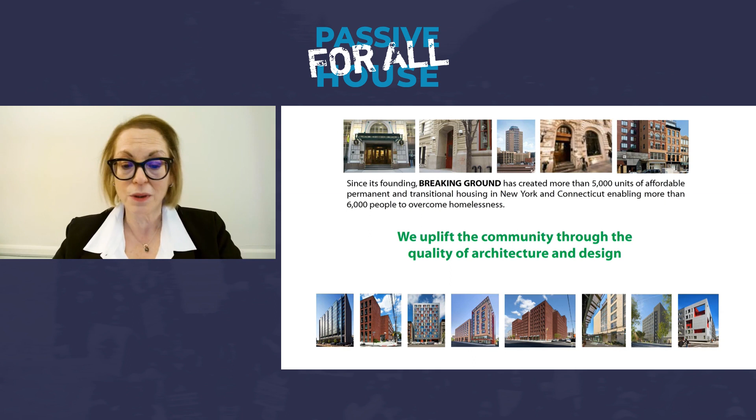We do street outreach in Brooklyn, Queens, and Manhattan. We provide some transitional housing and drop-in centers, but we primarily build permanent supportive housing where all of the tenants have rent-stabilized leases. We provide social services to all of our tenants. All of our buildings have on-site social services. We manage the buildings and partner with social service providers.

We house the chronically homeless, mentally ill, veterans, seniors, youth at risk of homelessness, people with HIV/AIDS, and low-income folks. Providing supportive housing is far less expensive than caring for people on the street. It saves the cost of EMS, emergency room visits, psychiatric hospitalizations, and incarcerations.

I'm always asked who pays for our building projects. It requires cobbling together many sources of funding. A typical project will have federal, city, and state funding, each with its own regulations and requirements, the largest source being low-income federal tax credit equity.

The buildings that we build don't cost any more to build than other supportive housing projects. However, supportive housing is a more expensive building type than other multifamily housing, as there is more plumbing and electrical work due to the higher proportion of smaller units with more kitchens and baths.

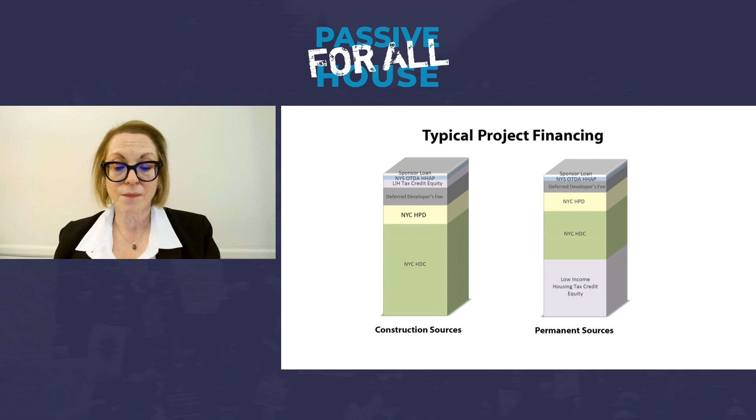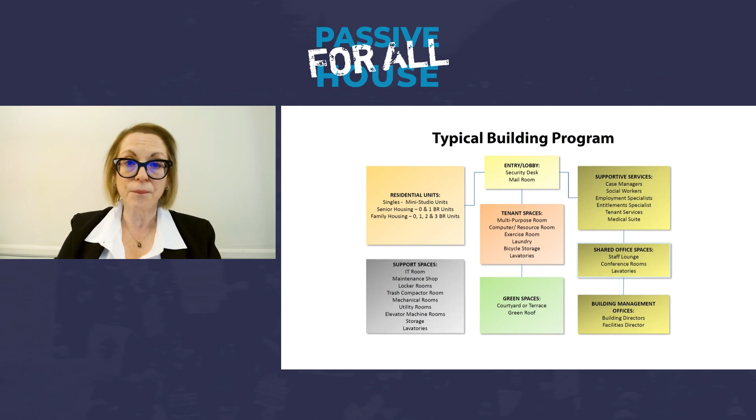We've been providing microstudios for 31 years. We're allowed to provide them in our new buildings as our projects are classified as community facilities with sleeping accommodations under Use Group 3 of the New York City zoning resolution.

The mini studio size has increased significantly over the past 10 years. New York City's supportive housing design guidelines and enforcement of federal ADA regulations have changed, requiring larger bathrooms and kitchens. The downside is that the larger the unit size, the fewer units we can fit in a building, the fewer people we can house.

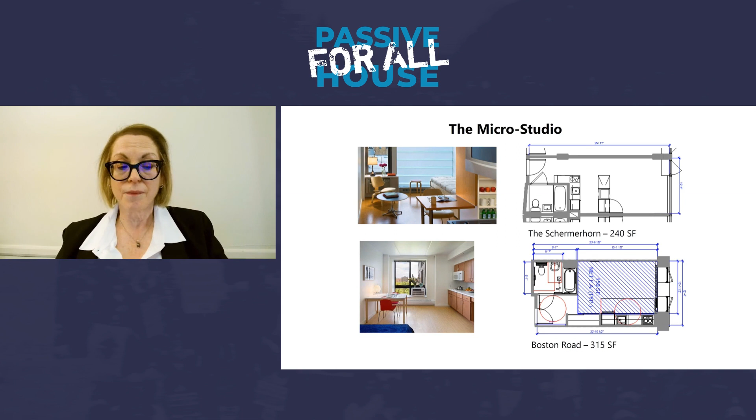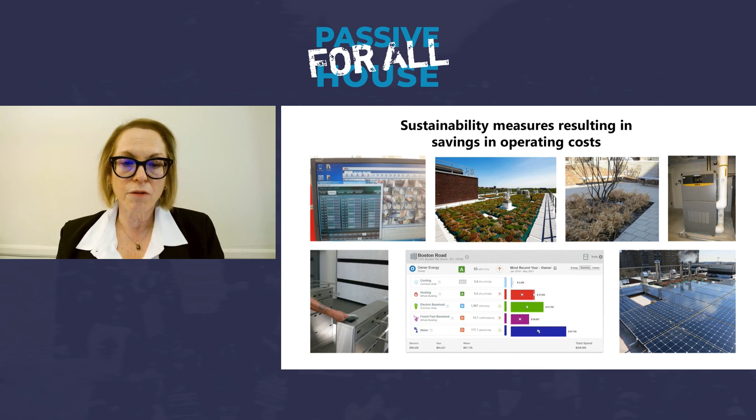Other common features in our buildings include green roofs, drought-tolerant planting, recycled materials, renewable energy, and high-efficiency boilers. We have always commissioned our mechanical systems and monitor energy usage across our portfolio. We insist on mock-ups and testing of wall systems. Our energy consultants and contractors perform blower door tests early and often.

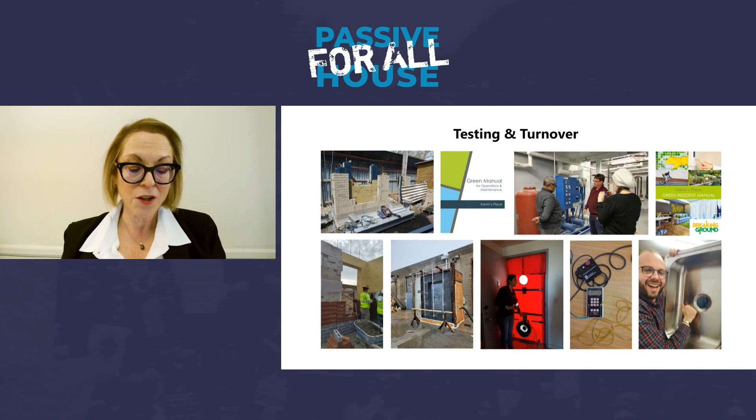We train our operations staff on how to operate all of our building systems efficiently. We contract our energy consultant to produce a green operations manual as well as a green resident manual. It is really helpful to recommission our buildings after the project has been occupied for a year. And as you can see, we also test the quality of our stainless steel sinks.

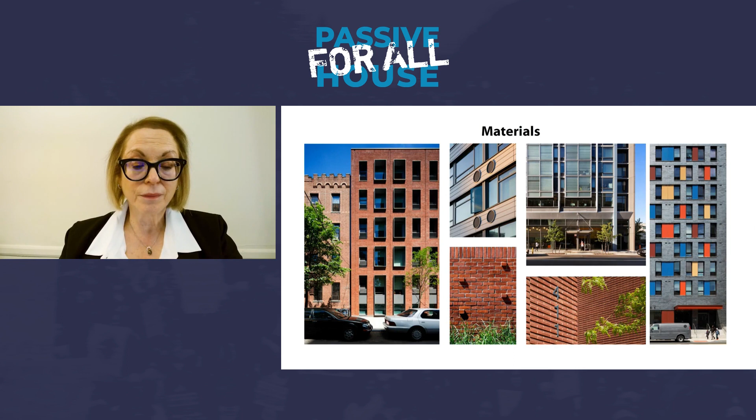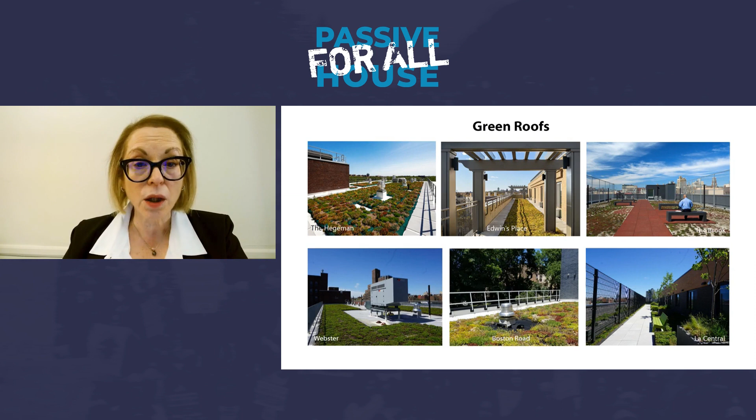Some of the things that make our building special are the materials we use. We build contextual buildings with high quality materials and construction. We give our tenants a safe space to enjoy nature in an urban environment. Whether for tenant relaxation or purely for energy conservation and stormwater retention, we provide green roofs in all of our buildings. We require that natural light be provided in corridors, lobbies, and public spaces.

And now a short survey of some of our buildings. Our first new construction project was the Schermerhorn, located in downtown Brooklyn. The architect was Ennead. The Actors Fund is our partner on this project, which includes a 200-seat black box theater. The low-income tenants are primarily related to the entertainment industry.

The flat plate concrete building sits on 4 steel trusses atop a subway tunnel. As it required a lightweight facade, the architect chose to use channel glass on the front and a cement board rain screen at the rear. The storefront space activating the street houses the Brooklyn Ballet School. The project is actually part of a larger development site. The developer of the adjacent luxury townhouses gained additional floor area, and we obtained the land for free.

The Brook is located near the Hub in the South Bronx. The architect is Alexander Gorlin. This is one of our first brownfield sites. The location was in a particularly difficult high crime area when we started the project. There has been much development since, including 2 of our own projects, La Central and our passive house, Betances project.

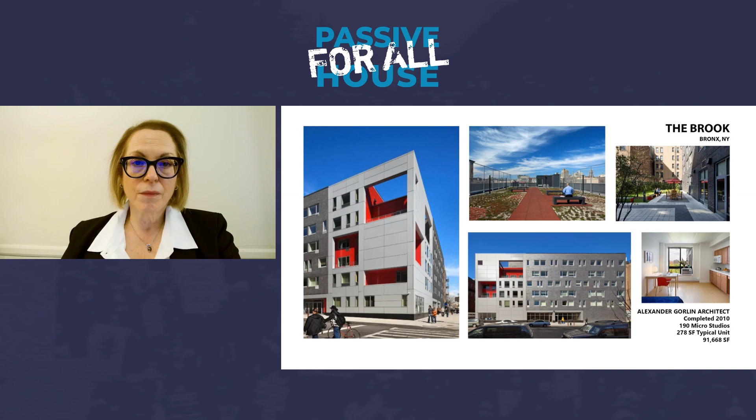We usually try and avoid building deep cellars to minimize foundation costs. All of this building's common office and mechanical spaces are located at the cellar level, the lobby slightly below grade. You ramp down to the cellar level to access these spaces. This is a zoning trick that we employ whenever possible, as the cellar space is not counted as floor area, so we can increase our unit count. All of our buildings have multi-purpose rooms that can be divided for different activities, laundries, exercise rooms, computer labs, and bicycle storage.

Boston Road is located in the Morrisania neighborhood of the Bronx and was another brownfield site. It is Alex Gorlin's second project for us, and some of the project's funding came from the Medicaid Redesign Team program, housing folks who have high histories of Medicaid usage. The building was more expensive to build than our earlier new buildings due to new requirements for emergency generators for life safety and larger on-site stormwater detention tanks.

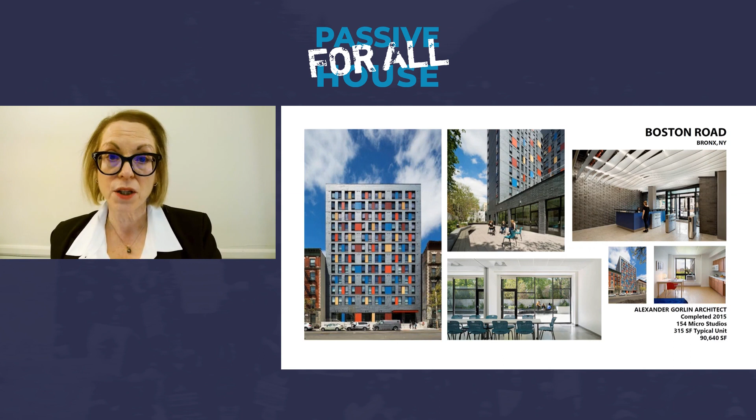We completed 2 projects on 1 large site in the Tremont neighborhood of the Bronx, working with CookFox once again. The brownfield site required extensive environmental mitigation, including a subsurface depressurization system. It was our first family affordable project and is an L-shaped building with studio, 1, 2, and 3-bedroom units, and a supportive housing project with micro studios and space for offices for our scatter site housing program, activating the street.

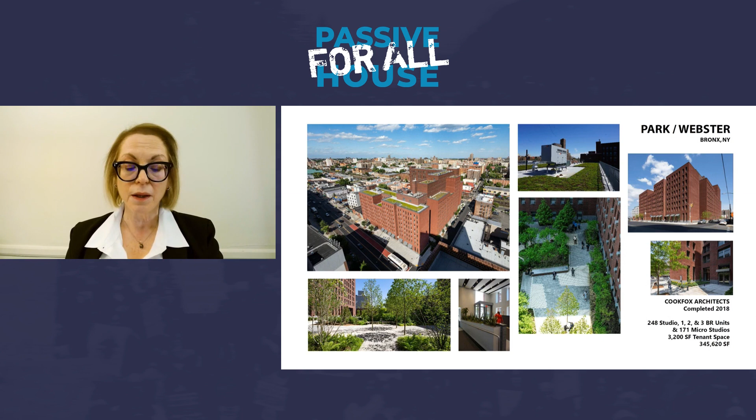The 11-story L-shaped building on the right is the affordable project, and the 9-story bar-shaped building on the left is the supportive building. They form a U enclosing a courtyard containing required parking for the affordable building, as well as a landscape recreational area.

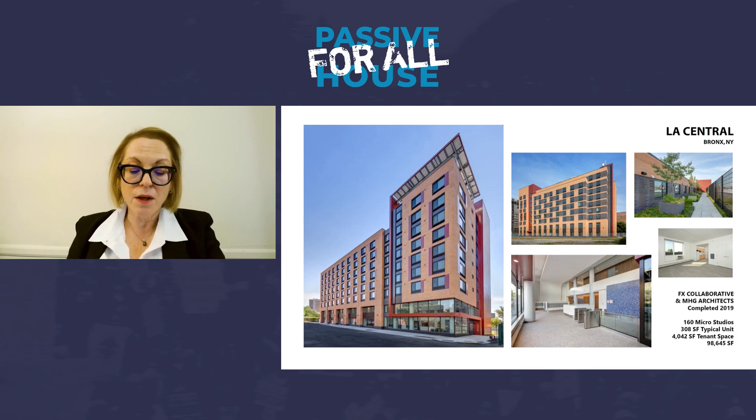We were fortunate to be part of the winning development team for the Bronx Chester RFP near our Brook Avenue project and the South Bronx Hub. Our 160-unit supportive building is part of a 985-unit mixed-use project sharing a landscape courtyard. The project's architects are the FX Collaborative and MHG Architects.

We just completed construction on our second supportive family project located in Brooklyn's Brownsville neighborhood. RAMSA is the architect. One of the difficult challenges that face this project is its proximity to an overhead subway line. Finding the right windows necessary to maintain a high OITC rating was a challenge. We ended up using triple glazed windows suitable for passive house standards. The 3,000 square foot storefront space activating the street houses a nonprofit organization, the Power of Two, who coach parenting skills.

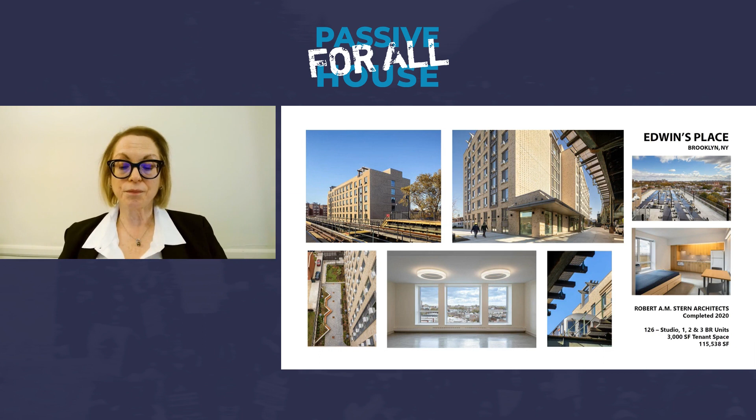A few years ago, we purchased the former Jehovah's Witness residence in Dumbo. After going through the ULURP process to change the zoning to allow our tenants to have permanent leases, we started construction in October of last year. We are renovating 491 studio and one-bedroom units, almost all with amazing views. The existing 31-year-old windows happen to be triple paned with integral Venetian blinds and are in excellent condition. We will be adding offices for our management and service provider, as well as tenant common spaces.

We are also seeking a tenant for the former commercial kitchen space on the subcellar level. The highest floor, with its 360-degree incredible city views, will house a nonprofit conference center. As you can see, we're going to have our work cut out for us from an energy standpoint in the future, controlling the high-pressure steam boilers. You can see the 1990s building management system.

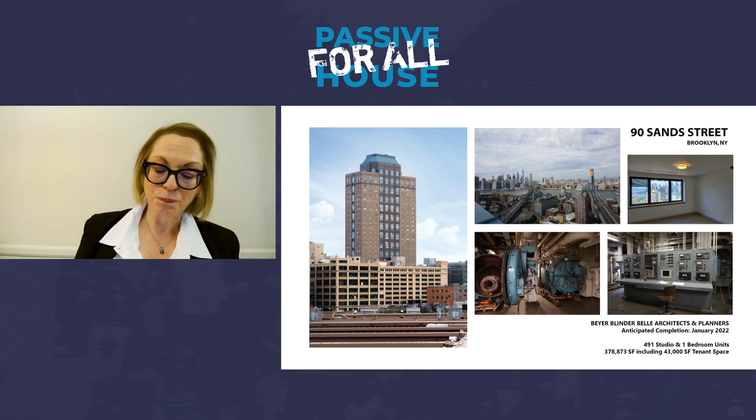Our next passive house project will be our second senior housing residence. It will also house a community health network clinic. This project, designed by Bernheimer Architects, is currently going through the New York City ULURP process, and it will be our first project in Queens.

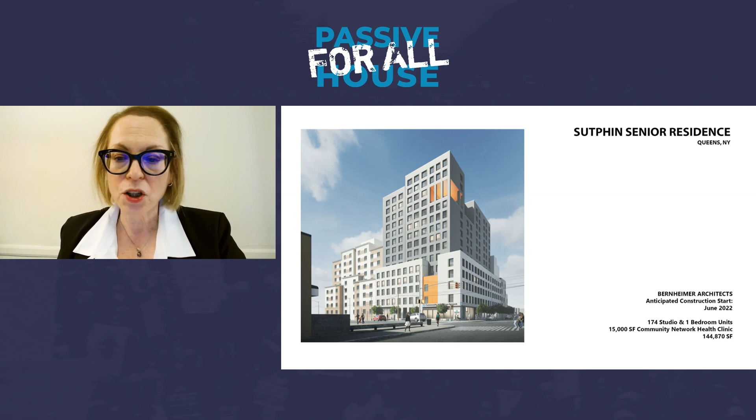Now to the project that we want to focus on today. Once again, we were fortunate to win an RFP for a project in the Mott Haven neighborhood of the Bronx with CookFox, this time for 2 connected sites, creating a through-block site, one a New York City Housing Authority site and the other an HPD site. It will house 152 seniors in studio and one-bedroom apartments, and there will be a 5,000 square foot space for DreamYard, a nonprofit providing an early learning center and after-school arts program. We're looking forward to the opportunity for the seniors and the young people to interact.

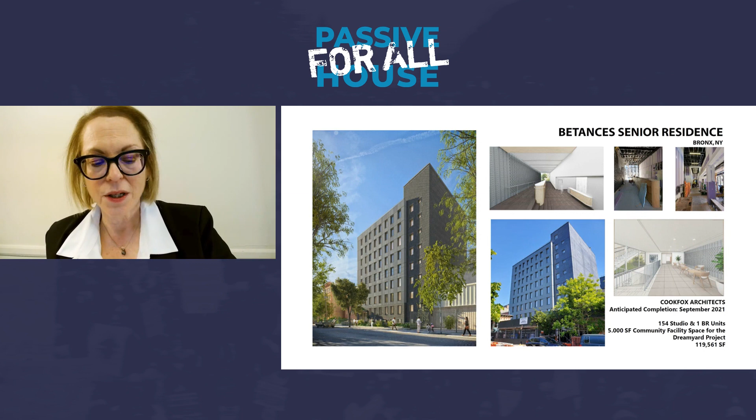Adam, take it away. Thank you, Brenda. I'm Adam Bollier. I'm an associate at CookFox Architects. I've been working on this project since the beginning of design.

Let me briefly introduce you to CookFox. We have projects all throughout New York, as well as along the East Coast and into the Midwest. We are probably best known for the Bank of America Tower at 1 Bryant Park. It's a LEED Platinum skyscraper that started back in 2004. More currently, besides many other projects, is the project in this image, which is converting the St. John's Terminal on the west side of Manhattan into a high-performance workplace for Google. It utilizes a double wall facade to manage sun and glare overlooking the Hudson River, and it maintains a portion of the existing railway.

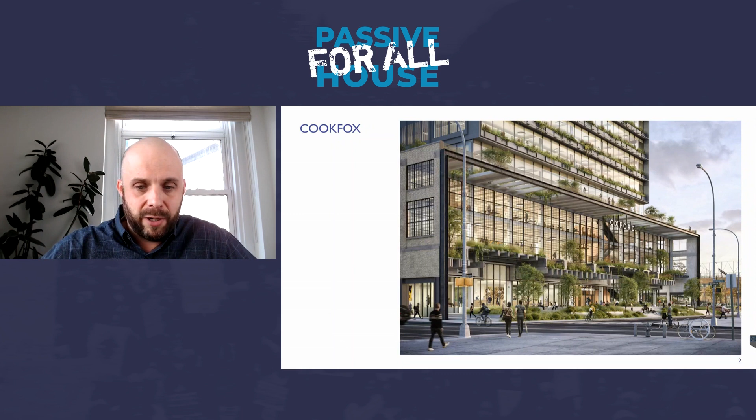For us at CookFox, there are 2 pillars that drive our work: environmental sustainability and social equity. Green spaces, healthy interiors, high-performance buildings are just some of the ways that those principles manifest themselves.

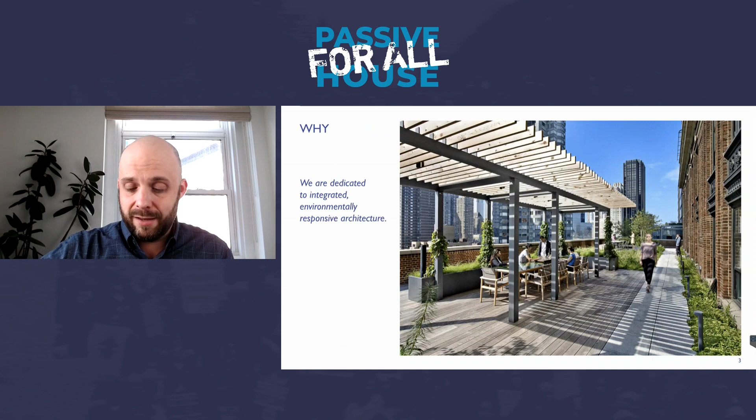For instance, in this image, we try to walk our talk as much as possible. This is from our office. We have 3 terraces. We keep bees. The office is WELL Gold, LEED Platinum. And while work from home has been effective and necessary, I'm looking forward to spending more time back in the office, needless to say.

As Alyssa mentioned, CookFox and Breaking Ground have worked together on a few projects before. Breaking Ground has been a great partner, and we've been very fortunate to work on those projects together.

The Hegeman is a supportive housing project for formerly homeless individuals in Brownsville, Brooklyn. That's a project where we learned a lot about cost-conscious supportive housing. And that project integrates access to green space, access to daylight, and really makes the building part of the neighborhood.

Similarly, a few years later, the pair of buildings in the Webster Residence and Park House in the Bronx, further north than the project we're discussing today, also integrates access to green space, daylights the corridors, integrates healthy interiors.

So moving on to Betances Residence. Here's the immediate context of our site. Primarily residential, a variety of scales, single-family houses, multifamily housing, and high-rise public housing, as well as a mixture of commercial and post-industrial buildings as well.

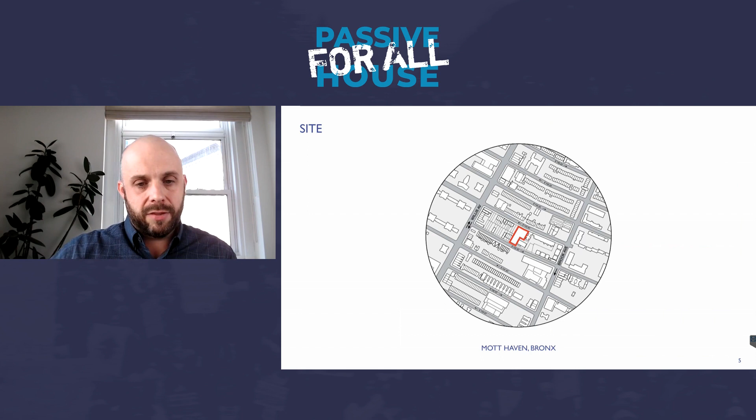A couple other factors to mention. The site's a through lot facing on 2 streets, and you'll also notice that the streets have a subtle bend right there at the midpoint where our site is located. Here's the site from the south, a vacant lot. You can see the gap in the street wall that this creates.

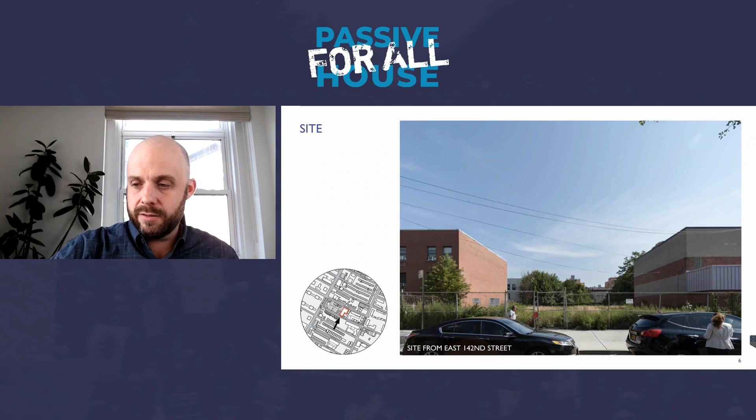And then in walking through the neighborhood and getting a sense of scale and architecture, there are some takeaways. Green space. There are yards, front, side, and backyards. There are community gardens, city parks, public housing of the tower in a park typology.

Texture and articulation. There's rich brickwork all throughout the neighborhood and the area, with varying levels of complexity, sometimes the simplest being the most compelling. These details picking up shadow throughout the day help articulate the depth of the facade and change throughout the day and the year. And then textures making the changes in materials more apparent. Brick, stone, wood, metal, glass.

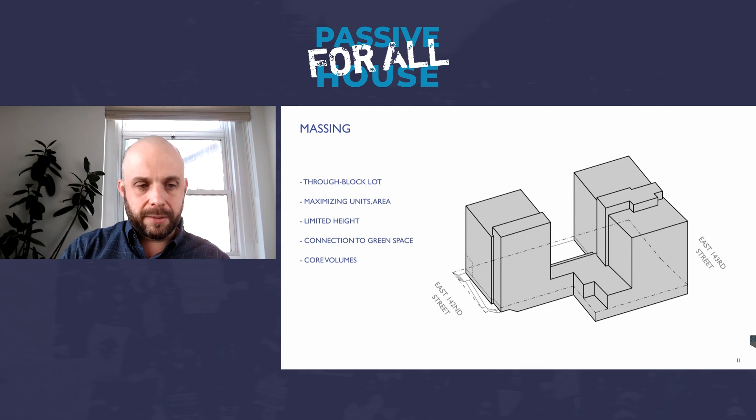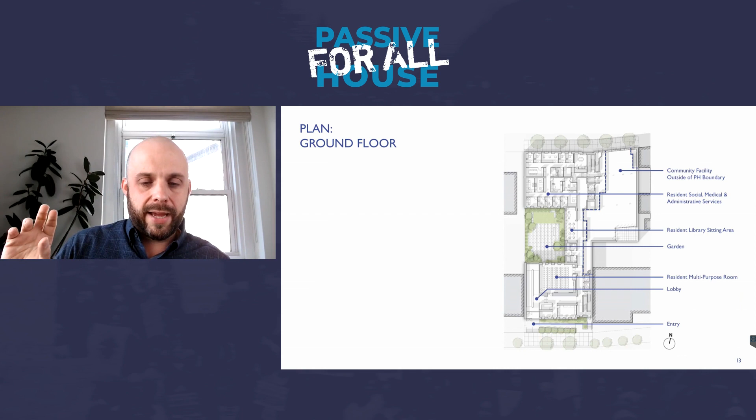Moving into the ground floor and sort of following a typical circulation path. From the south, there's a mild incline to the south entry. Our lobby is glazed on either end, cutting through the building with a view to the garden. And then the amenities are organized around that garden space, the multi-purpose room, the library sitting area, and then the social and medical services also overlooking the garden. The garden itself will have seating areas, benches, and a turf area for future yoga and fitness classes.

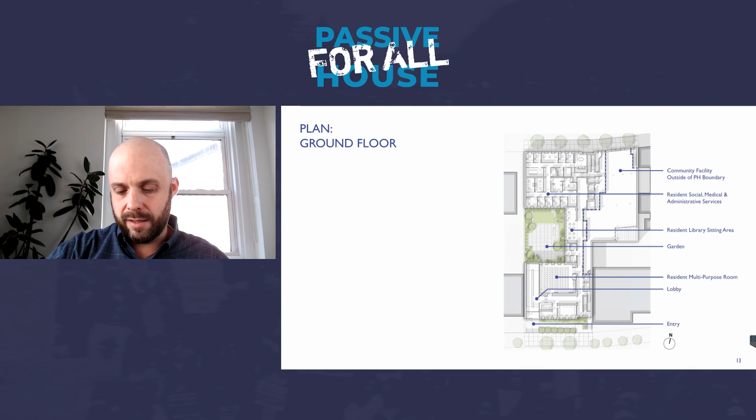On the right side of the building, there's a future tenant space for a nonprofit community tenant. That is actually outside of the Passive House boundary for this project based on some other considerations. Moving on to a more typical floor. The units here are a mix of studios and one-bedroom units. There are none of the micro units that Alyssa was talking about before, but these units are organized around that center garden space with views to the green space.

It's important to note the corridors at the elevator and stair lobbies have windows on either end, getting daylight into those corridors, views back to the green space. The stairs have a landing on each floor with a window. The stairs themselves have a mild rise run using only 7-inch risers. In the city, we're allowed to go steeper than that for multifamily, but to maintain walkability, this doesn't exceed that.

And there's a green roof also on the second floor. There's access with a vestibule from both towers out to that second floor extensive green roof. There'll be pavers and a ramp down to it as well, handrails, etc.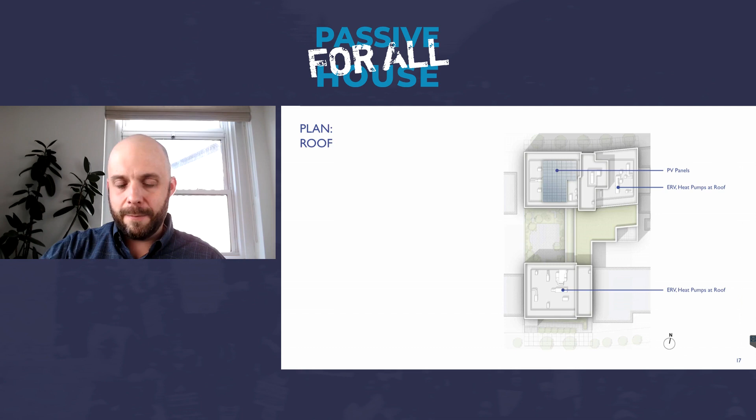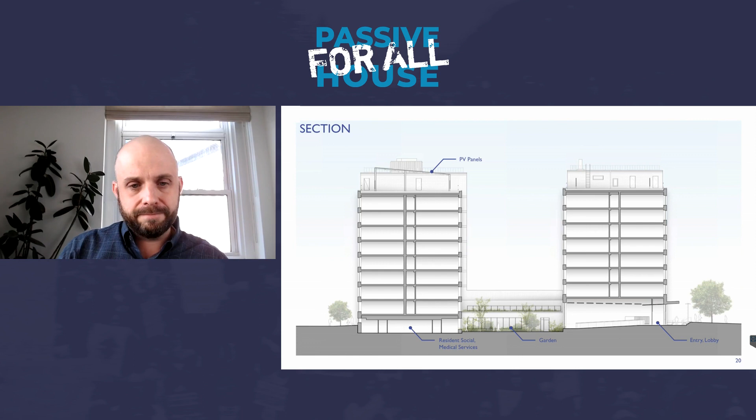In terms of materials, there's an emphasis on natural materials. There's brick, which is common to the area. This particular brick is a deep color with a silvery sheen. The metal rain screen is zinc. It has a live patina, and it uniquely changes color with the light during the day. It can be silvery cool or golden warm as the light changes.

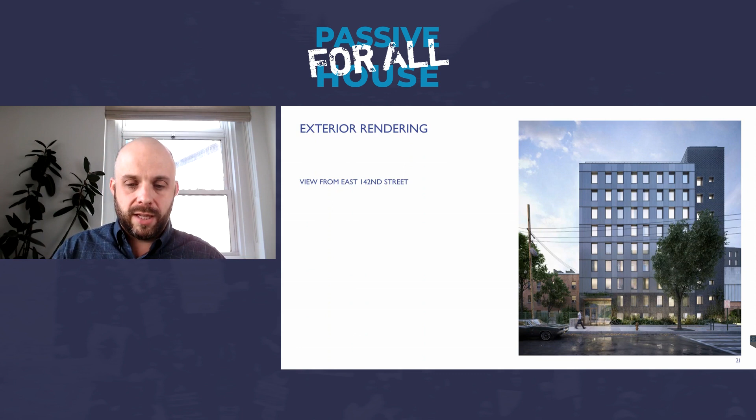And very importantly, in this view, you can see in the lower left the lobby space with the view through to the garden. Here's another rendering, also of the South Tower, the massing of the core versus the residential wing, the different materials.

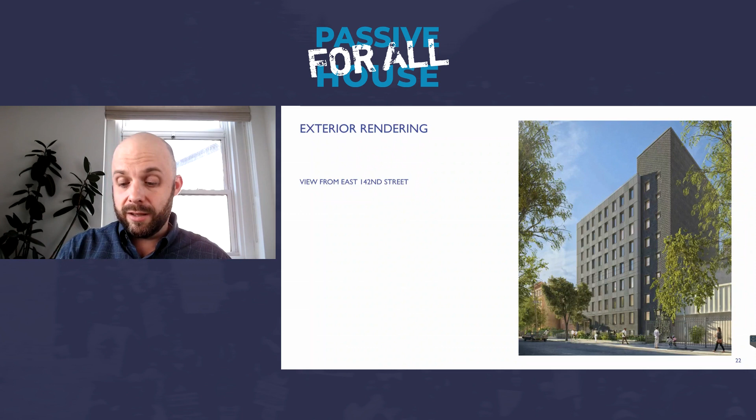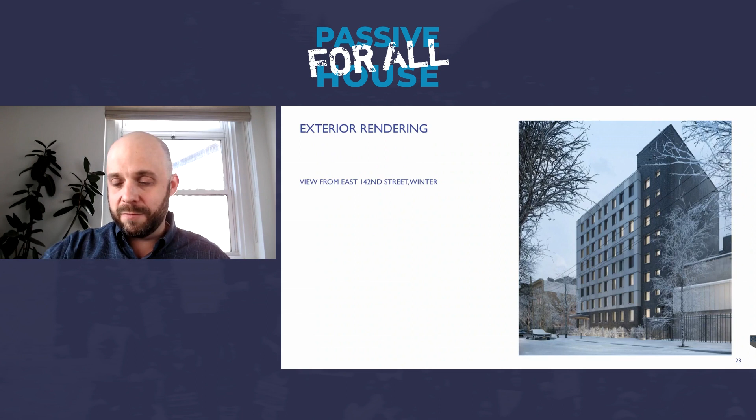And then my colleague Giacomo, who did this rendering as well as the other one, wanted to experiment with what he would call his passive house rendering, in which he managed to very convincingly model snow. And it also looks pretty convincing that the building would be warm and comfortable even in icy conditions. Okay.

Speaking of keeping the elements out, here's our typical window at the zinc panel facade. A UPVC window installed in the block bearing wall leaves us with the potential issue for thermal bridging around the window frame. So to mitigate that, we're extending the insulation and rain screen over a portion of the frame, at the head and the jambs at least.

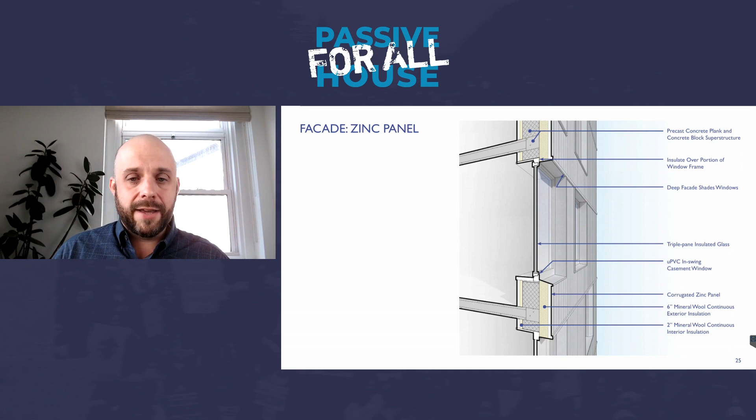One thing to note is that in order to install this, it means the windows need to be installed before the facade. That's a topic that we'll revisit in discussing the punched windows at the brick facade.

In terms of the zinc itself, it's worth noting that we're using corrugated zinc. It allows us to use a thinner gauge material, and we have a horizontal detail at every floor that gives us more tolerance in construction, as the building up and down, in and out, has some construction tolerance, and it aligns with the head of the windows.

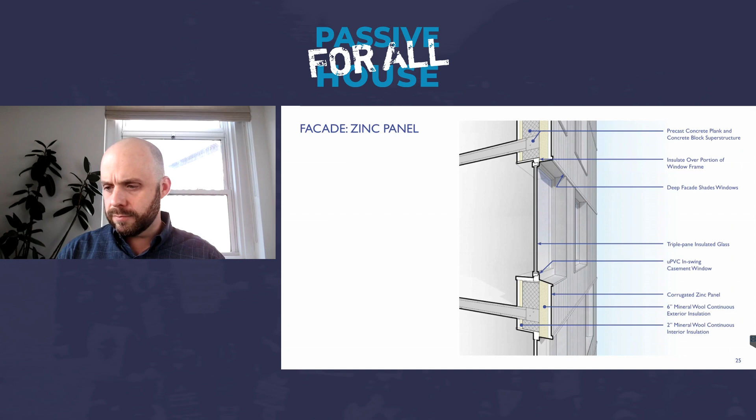As I move through the details a little bit, we have some THERM modeling courtesy of Steven Winter Associates. I think this helps illustrate how the insulation helps mitigate that bridge happening right at the edge of the window frame in the rough opening, enough to maintain the comfort criteria inside.

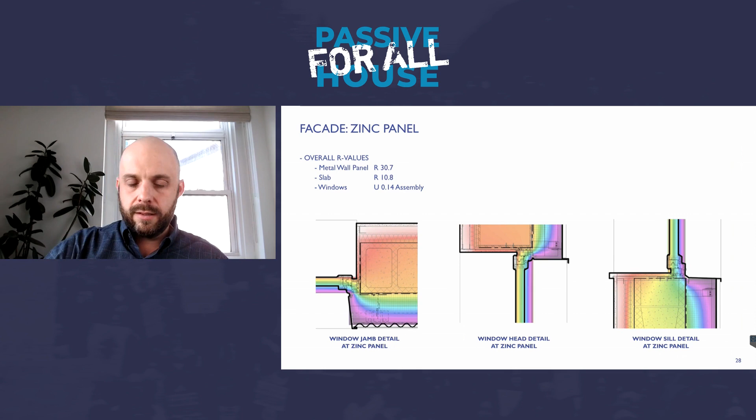Okay, at the brick facade, one of the conventions of this type of building, i.e. masonry-clad affordable housing, is that windows are installed from the interior after the brick is in place. While we explored alternatives with Monadnock, we were looking at big potential impacts to cost. So this included potentially installing brick, then windows, then returning via suspended scaffold to install a metal frame or closure between the window and the brick.

Especially with a job that must satisfy prevailing wages, which is basically union designations and wages, it was not economical to do that. Meanwhile, installing windows first, then brick was a non-starter for fear of damage to the windows, and would still require sealing the windows and installing a closure from the mason scaffold. Mixing trades on a scaffold is also probably a non-starter. So, working out a window that could be installed from the interior and satisfy passive house criteria became the exercise.

So we started looking at pushing the window out to the back of the brick, more in line with the continuous insulation. And the ways we looked at doing that were with AAC block configurations, various brick returns, many different products and materials to close the inside of the cavity. All of this in steady collaboration with Monadnock and Steven Winter Associates.

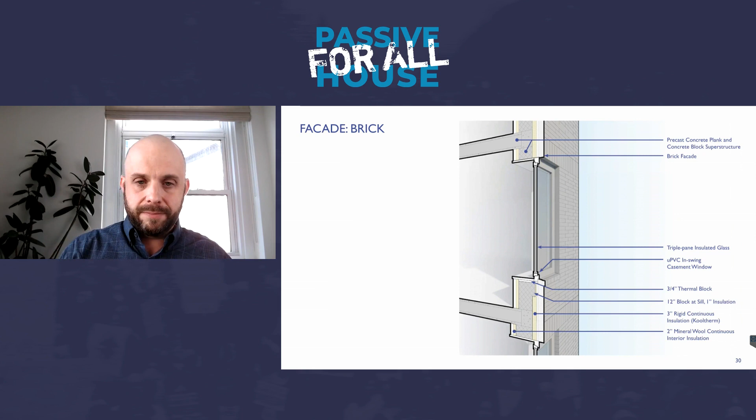Where we eventually arrived, as we move ahead through our details, we're using Kooltherm insulation to achieve a higher R-value per inch, which comes at a cost premium compared to a thicker depth of mineral wool. It minimizes the depth of the cavity and how far we need to push the window and the brick out.

We're using a deeper block at the sill of the rough opening to support more of the dead load of the window. And then we're using fiberglass angles. These are from Smart CI to close the inside of the cavity. Then we needed to sort out sequencing of the air barrier, peel and stick, sealant, etc.

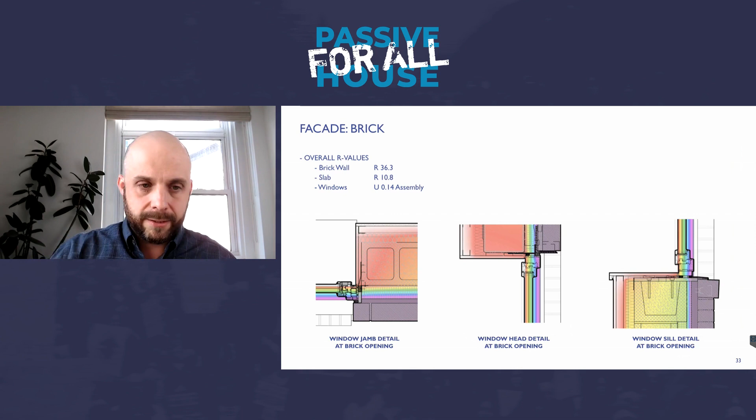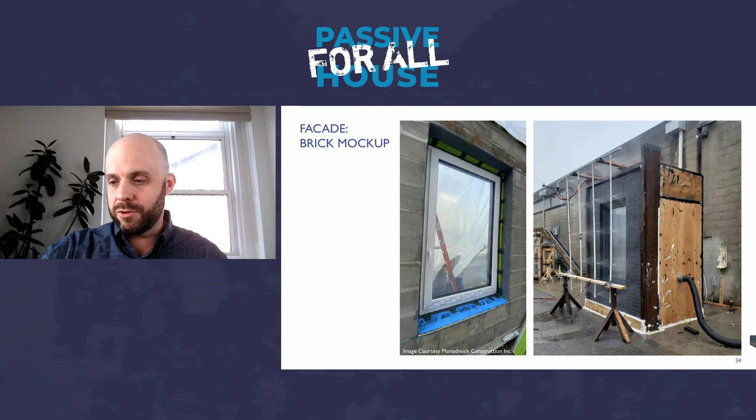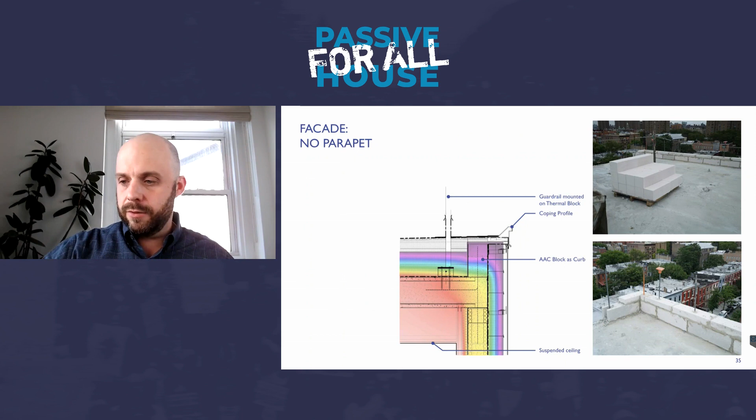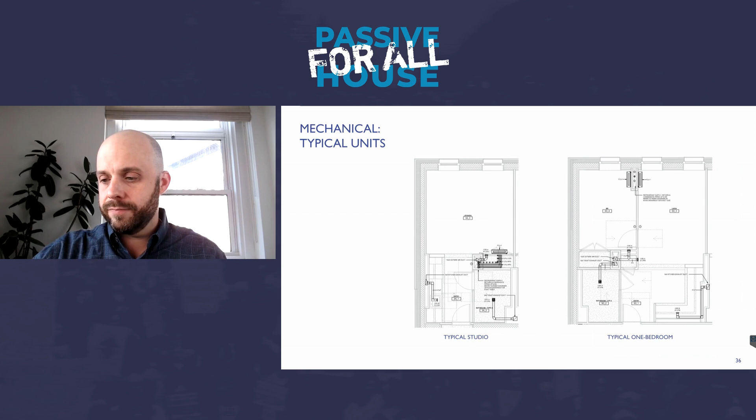Okay. Changing gears a little. The mechanical strategy at the units is pretty straightforward. We knew, based also on Monadnock's guidance, that we wanted to avoid VRF lines in the walls. That said, based on the floor-to-floor height, we couldn't have ceilings in the living area, at least, and in general don't have ceilings to work with. So what results is having the fan coil units above the closets with the runouts over the closets. Ceiling height there is kind of sacrificed. And at the one bedrooms, keeping the fan coil units on either side of the wall between the bedroom and living area.

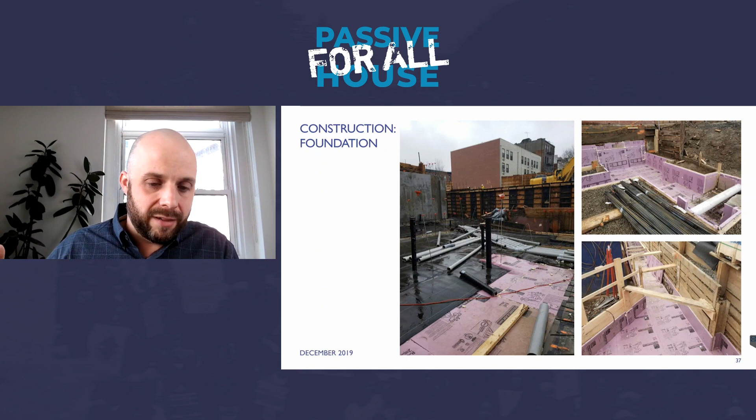Okay. So for a project still in construction, we can take a bit of a construction walkthrough. Starting with the foundation, with occupied space on the ground floor, slab on grade, and with spread footings. What resulted was a need to have insulation under those slabs and even under the footings. So you're looking at high pressure insulation underneath the footings with some pretty diligent attention to spray foaming the joints between the insulation boards.

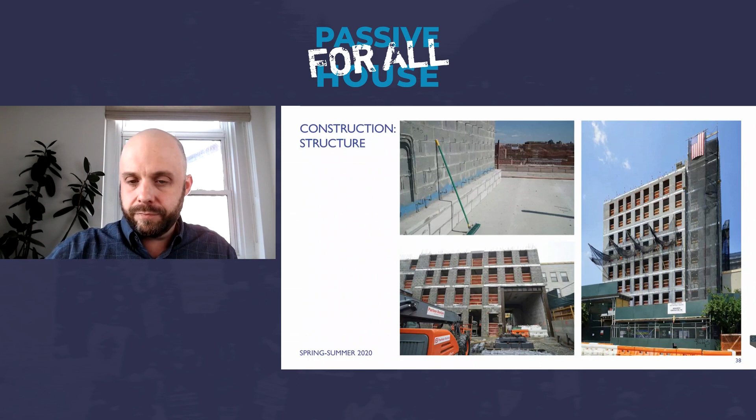The structure is relatively straightforward for this building. Something you can note, in the upper left photo, you can see AAC block being used as the brick ledge, where brick on the bulkhead there is going to be coming down and preventing a bridge through the roof right there. Air barrier on concrete block is pretty conventional, but achieving passive house levels of airtightness does take some serious thoroughness. One other thing you can note is that on the right, you can see the windows are already installed in that facade. That's a facade due to get the metal rain screen.

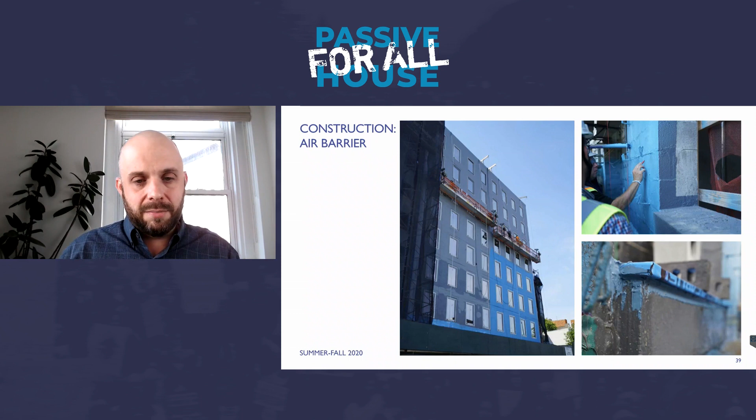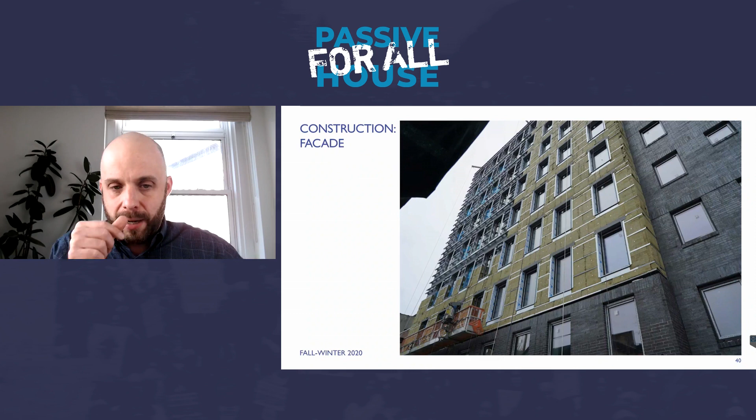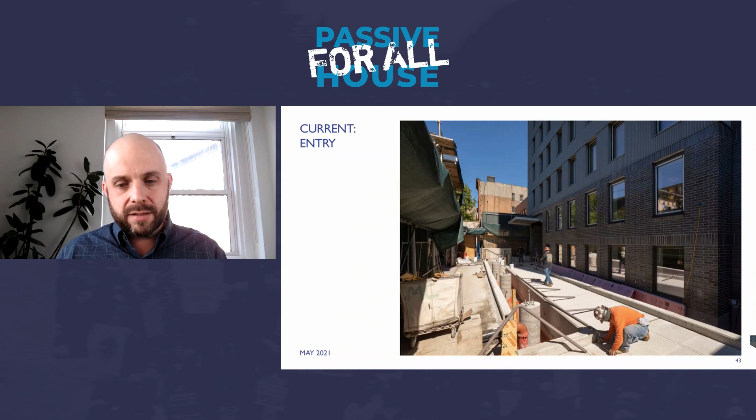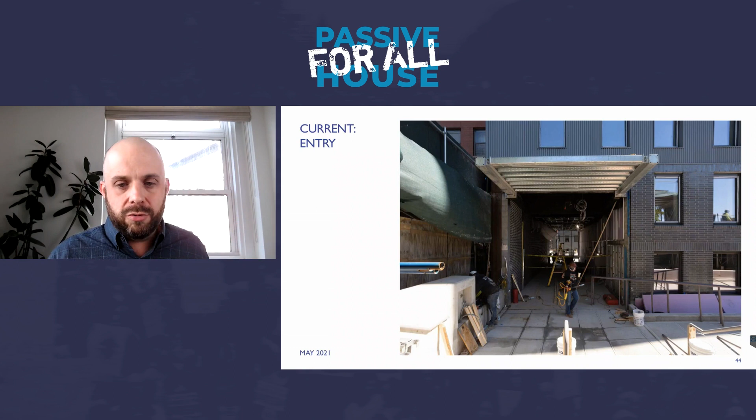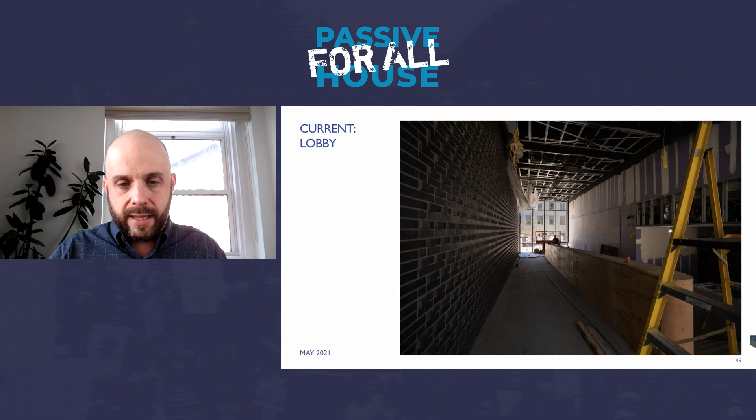Here's looking towards the future lobby with the view through to the garden. Here's the view in the lobby. That center wall will be clad in wood slats. Here's a view from the garden looking back towards the lobby. The library is just to our left. You can see the roof above the library there steps down to keep access to daylight in the garden.